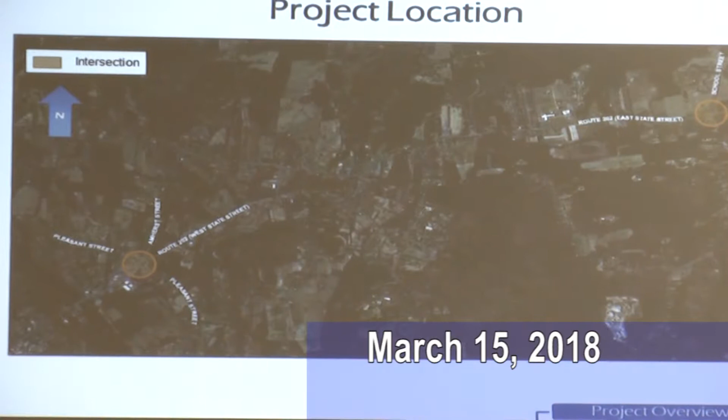This project covers two intersections, the 5-corner intersection and the School Street intersection. You can see in the locus map, for the 5-corner intersection, the project along Route 202 is about 1,400 feet long, and for School Street, it will be 1,100 feet long.

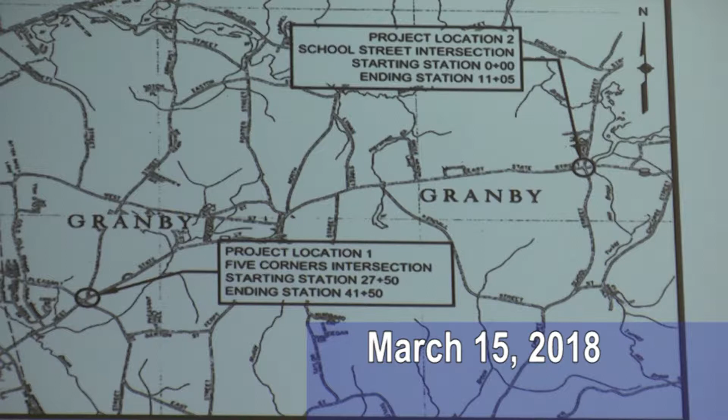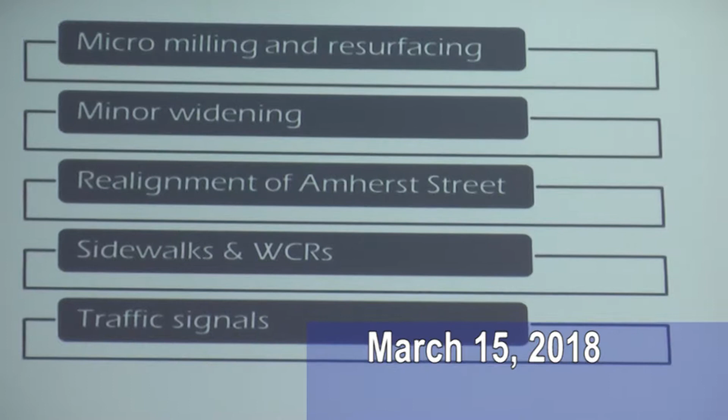The scope of work so far will cover the micro milling and resurfacing, minor widening, realignment of Amherst Street, sidewalk and wheelchair ramps, and the traffic signals. I will talk about the background and history first.

Both locations are ranked within the top 5% of high crash locations within the PVPC area, so they are eligible for the FHWA's Highway Safety Improvement Program. So a road safety audit was conducted in March 2013. An RSA usually is a formal safety examination of a roadway by a multidisciplinary team. The purpose is to identify safety issues and possible improvements considering all roadway users.

So this team took a walk, discussed and reviewed the crashes, and then identified safety issues including congestion and driver frustration, speed and sight distance, intersection geometry and signage, turning lanes, signals, access management, and pedestrian accommodation for these two intersections. So our design will try to address these safety issues identified in this RSA.

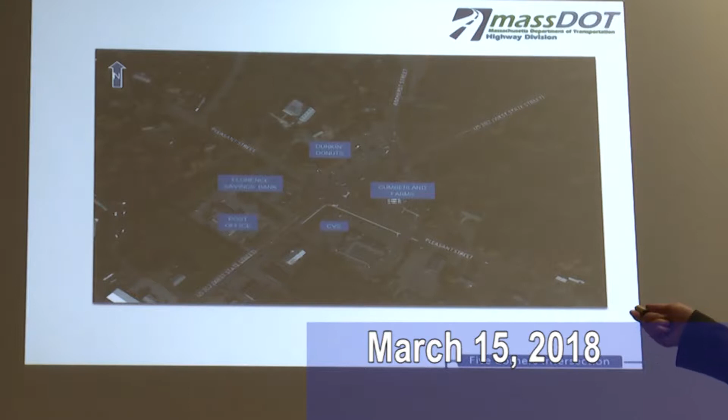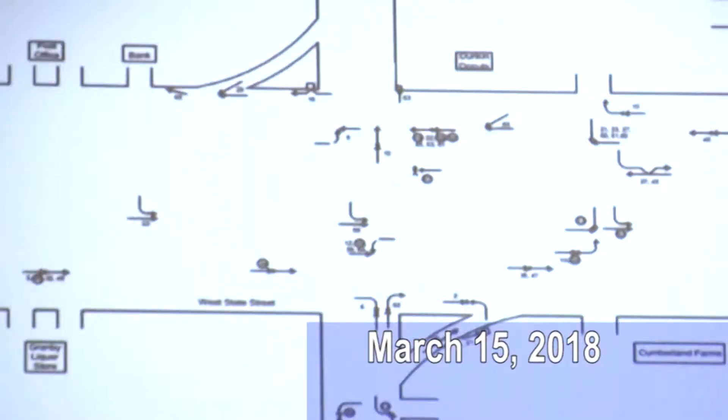The 5-corner intersection in fact includes two separate intersections, 250 feet apart. This intersection, Pleasant Street and Route 202, is a signalized intersection, and Amherst Street, the Cumberland Farms driveway and Route 202 are stop controlled at Amherst Street, an unsignalized intersection. Here is a crash diagram.

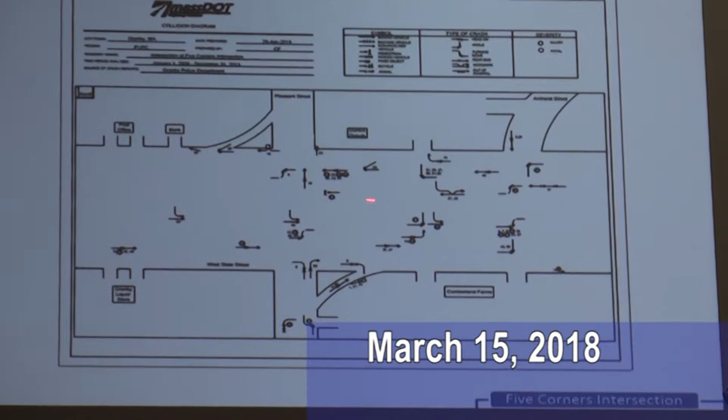For these 69, we can see there are 51 on Pleasant Street and Route 202, and 18 on Amherst Street and Route 202. So we ran a little more analysis and we can see about 44% of crashes happened in the afternoon commute time between 2 and 6, and 14% happened in the morning commute time. And most, 42%, are angle, and 36% are rear end for this intersection.

A further analysis shows there are about 10 crashes related to the left in and left out of Dunkin' Donuts, and another 2 related to the left in from Route 202, cars driving this way and trying to turn left into Dunkin' Donuts. There are 10 crashes where they're trying to turn left into the Cumberland this way. So these are two very typical crash types at this intersection.

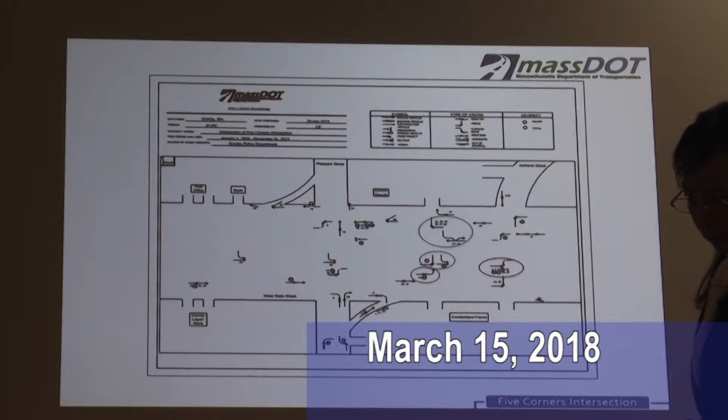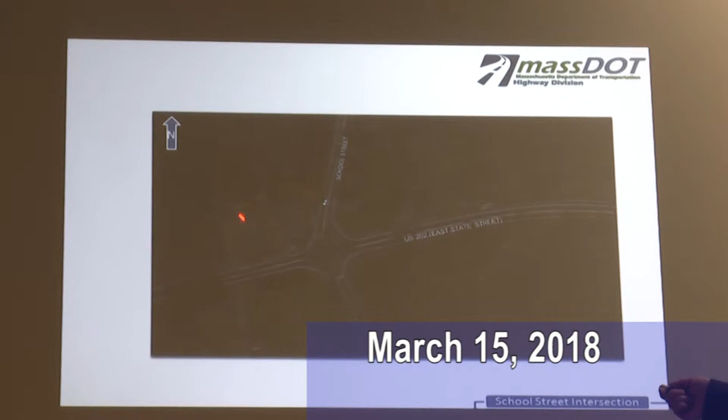So now we can talk about School Street. School Street is just one lane for each approach, and here is stop sign control. The Grand Cafe was here, but it was demolished in 2014. So basically, the land use around School Street is very rural.

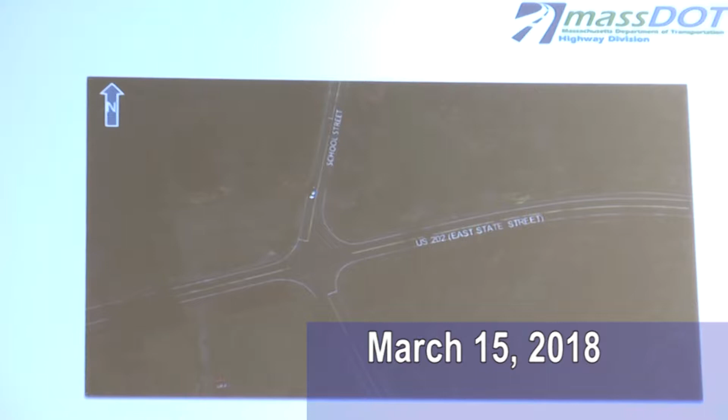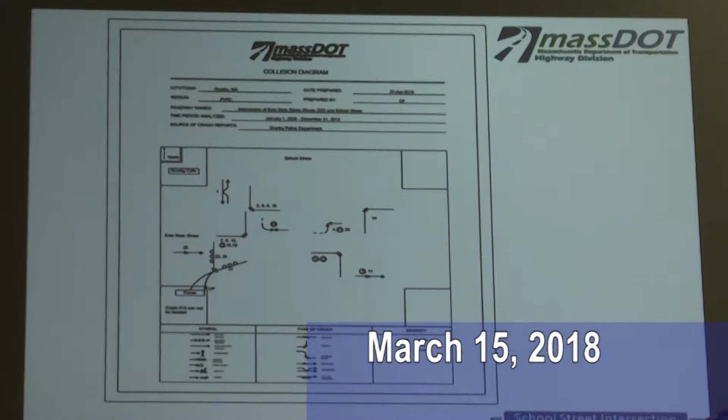So here are all the crashes for School Street over these six years. We can see there is another peak for the afternoon commute, about 40%, between 2 and 6. And the pattern is a little bit different between these two intersections. Here, 52% are angle, and 20% are sideswipe.

You can see here a lot of crashes in fact happened between southbound vehicles from School Street and Route 202 traffic. Although this is controlled by stop signs, still a lot of crashes happened between these two.

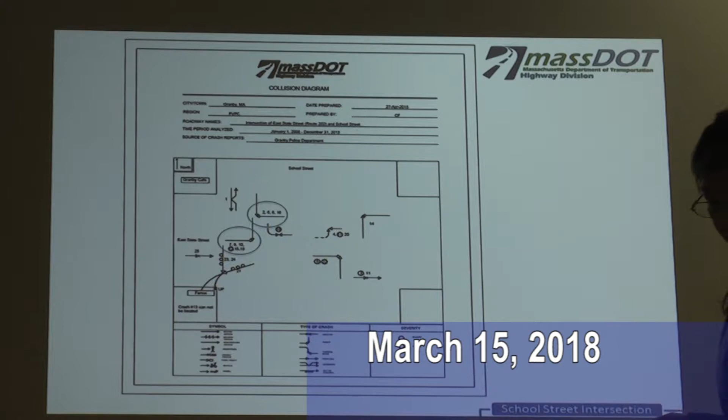Okay, now we come to the third part, project design consideration.

Route 202 is classified as an urban principal arterial. The design speed is 45. Route 202 has 12,783 ADT in 2014. This is Route 202's number. This project mainly is for safety improvement.

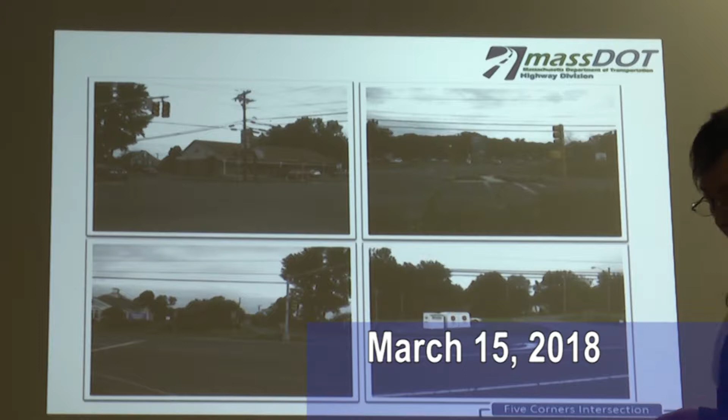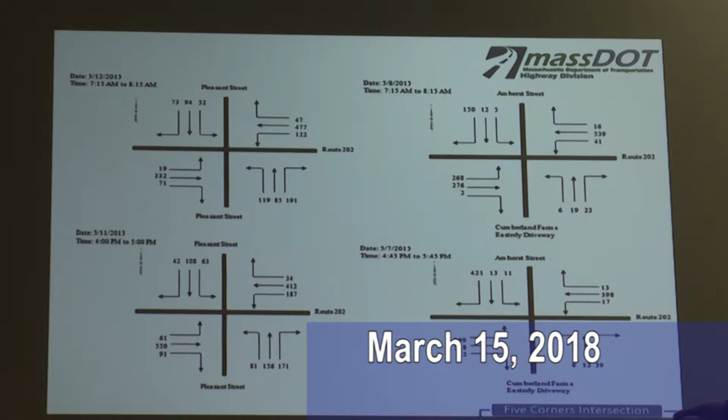We did ATR in May 2015, and here we put the count west of Pleasant Street, north of Route 202 on Pleasant Street, and then we got this number, and you can see the morning and afternoon peak. This is the turning movement count in May 2015, and based on the turning movement count we got the crash rate for 5-corner is 1.07. For the intersection of Pleasant Street and Route 202 it is pretty higher than the average rate across the district.

Since the safety for Amherst Street and Route 202, we explored the idea of signalization. So we ran the MUTCD traffic signal warrants, and we found out it meets 3 warrants. Only for warrant 7, only 1 criteria meets. And we ran left turn lane warrants too. For Route 202, the approach to Amherst Street from the east side has no left turn lane. So we ran the left turn lane warrants and they meet warrants.

So although it meets the warrant for the intersection of Route 202 and Amherst Street, signalization is not proposed at this point for this project because the two intersections are only 250 feet apart. It's very complicated to coordinate these two signals.

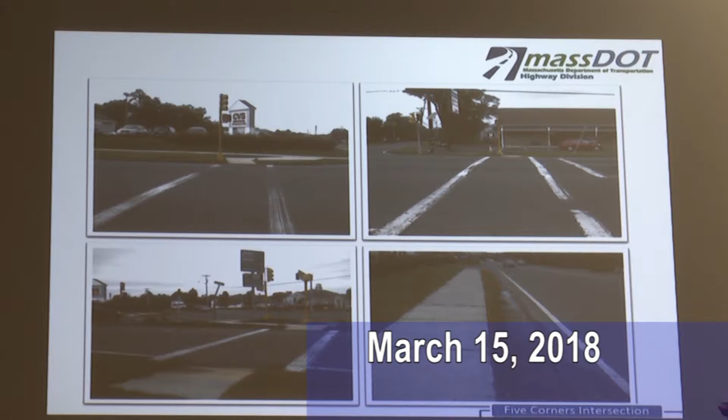Accessibility. The existing facility doesn't meet the current ADA requirements, and it's very hard access for the elderly, people with disability, and even children. You can see here, the intersection only has a section of sidewalk along the CVS pharmacy. For the rest, there's only a crosswalk and a wheelchair ramp. That's all the walking path.

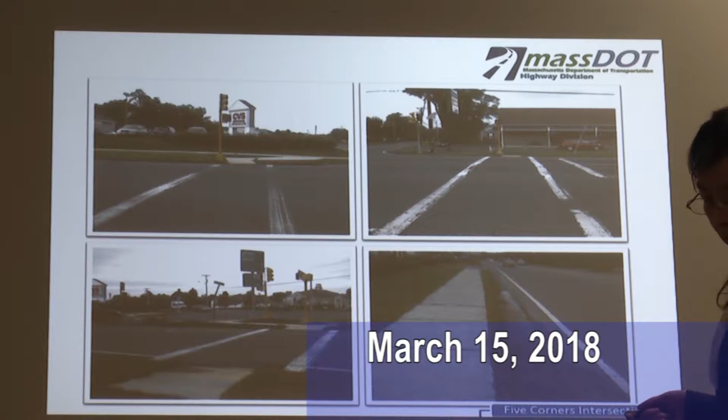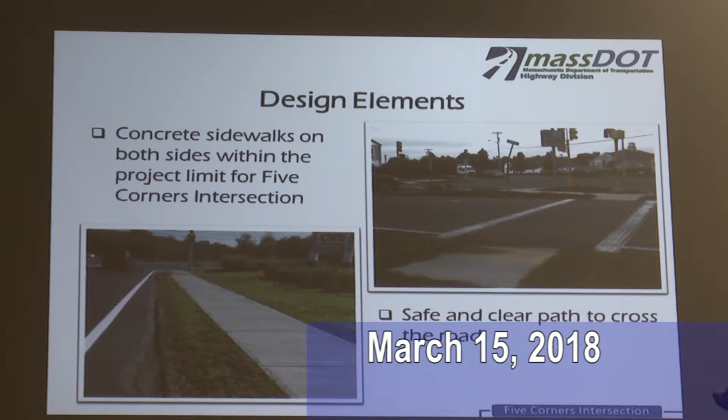So to improve this and accommodate pedestrians, we propose a concrete sidewalk on both sides within the project limit for the 5 corner intersection, and crosswalk, wheelchair ramp, pavement marking, pedestrian signal head, and accessible pedestrian signal push button to meet the ADA requirements.

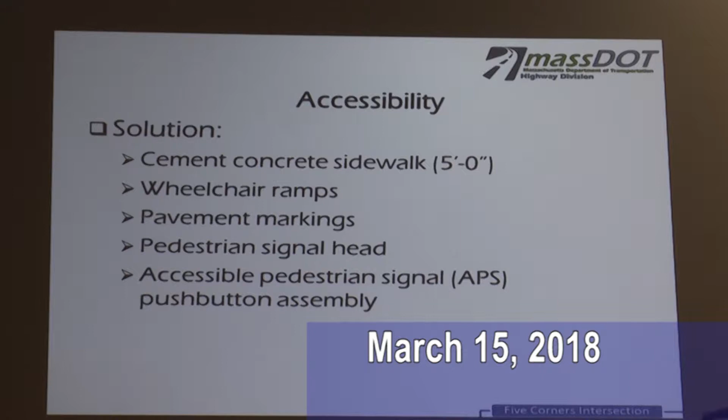So this design shows all the proposed work for the 5 corner intersection. You can see for access management, we propose right in and right out for the Dunkin' Donuts driveway. For pedestrians, we proposed sidewalk along the project limit, and all the sidewalks and crosswalks are signal controlled except this one for Amherst Street.

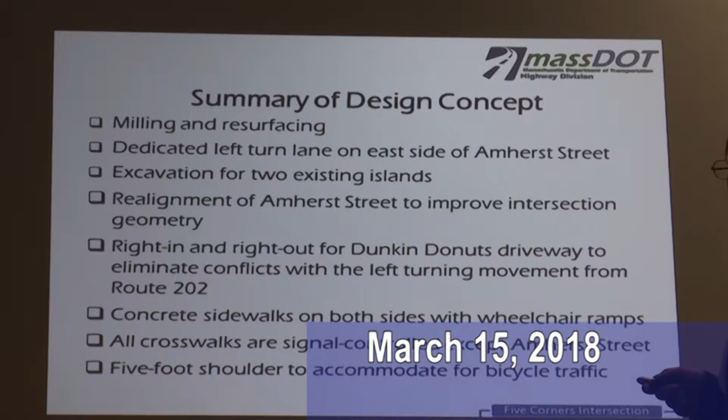We proposed minor widening so we can accommodate a 5 foot wide shoulder and this left turn lane for Amherst Street. We proposed micro-milling and resurfacing for the whole project, and we propose the excavation of these 2 existing islands, to make them small and easy to control. We propose to upgrade the signal heads so they align with the travel lanes. Right now the existing situation is not aligned very well.

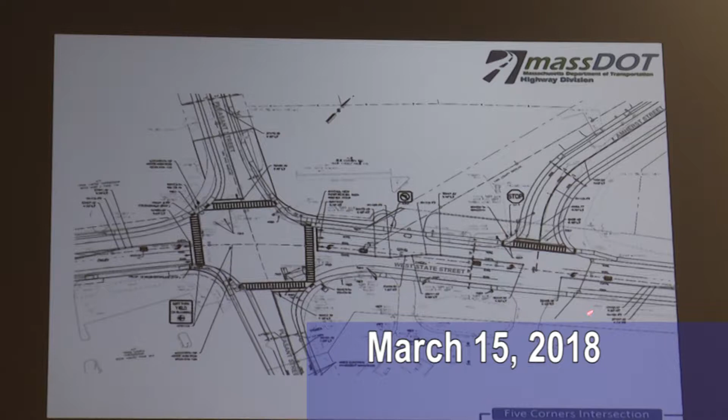Another big thing is trying to improve the intersection geometry. We propose to realign Amherst Street. Amherst Street and the Cumberland Farms easterly driveway are 20 feet apart. So we propose to realign them so they align with each other, making the left turn either from Route 202 to this street or Route 202 to the driveway easy. But a left turn vehicle parked here waiting will block people going into Amherst Street.

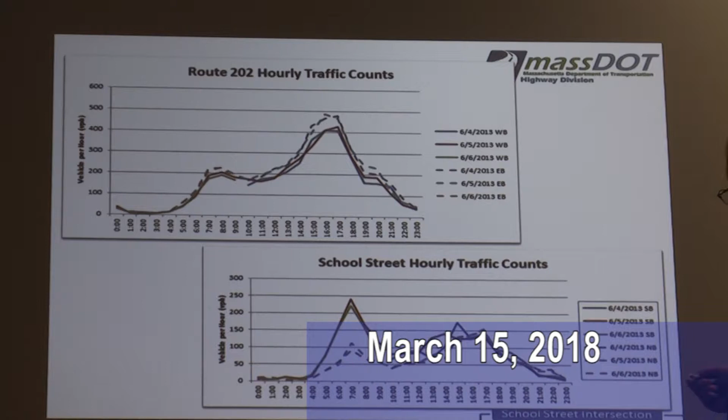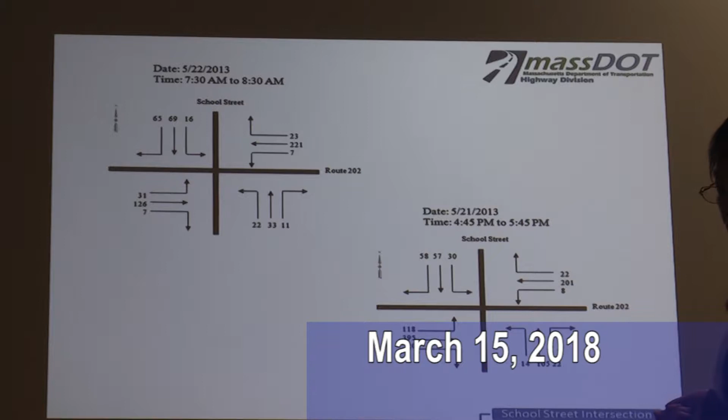Okay, now we move to the next intersection. This is School Street. School Street is pretty simple, with a single lane approach. We did the ATR, traffic counts, and turning movement, and got a crash rate of about 0.98. That's higher than the district average too.

So we ran the traffic signal warrant that is recommended in the RSA, and we found out they meet warrants 1, 2, 3. For warrant 7, criteria C is needed. Criteria B, which is crash, almost meets. The left turn lane warrants meet too. So for School Street, we propose to signalize this intersection.

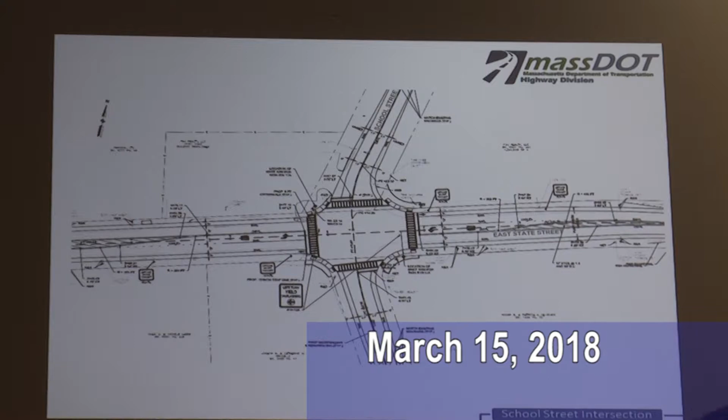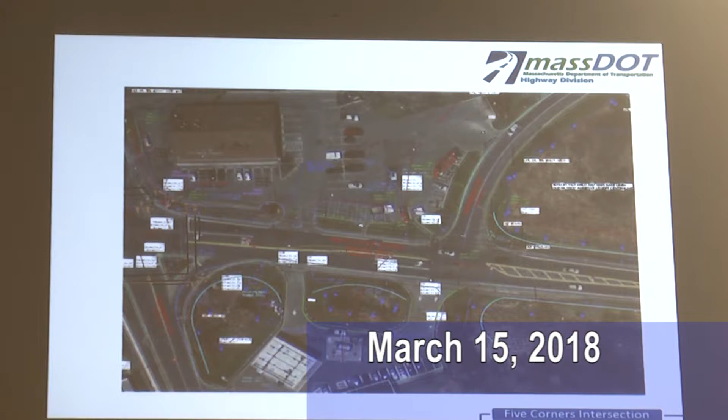So we explore the possibility to realign this driveway. The issue that brings is the wetland replication, because besides the driveway, it is all wetland. If we do flat slope work and the requirement, we need to replicate a wetland of 1,400 square feet. That we need approval from the environmental section and find where it is, because within the project limit, we couldn't find a place to replace this wetland. So that will be beyond this project limit and need permits from environmental.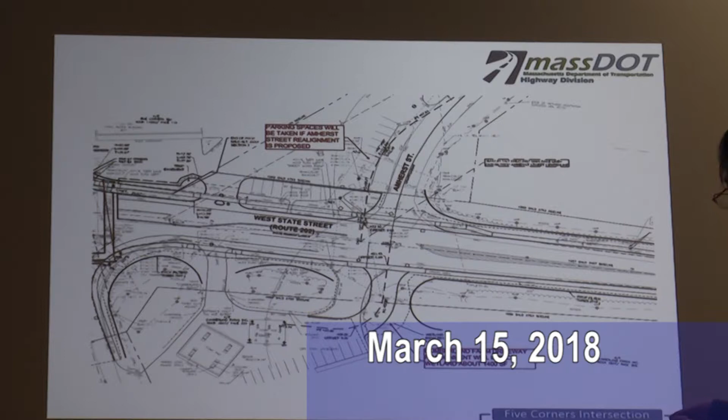Another alternative the design team explored is a roundabout. You know, across the state, a lot of roundabouts are built and they run smoothly. For these two locations, we did run a test run. But the problem is right of way here. Oh, I'm so sorry you couldn't see it very clearly. But for the 5-corner intersection, this roundabout is only for Pleasant Street and Route 202.

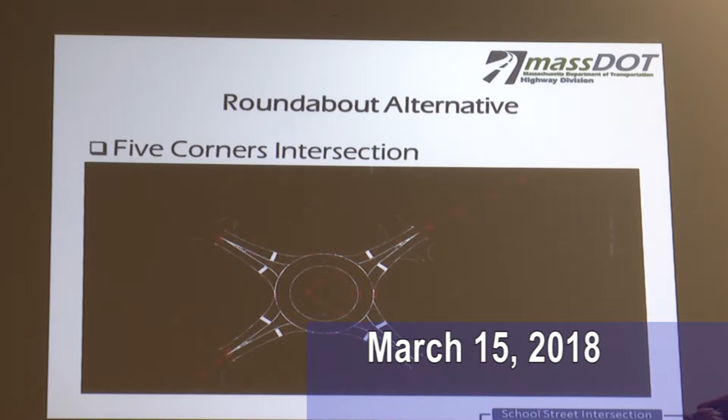To build this roundabout, for right of way we've got to take land from the city, Cumberland, and this owner, a lot of land we need to take. This only shows the edge of pavement. In fact, we need feet after feet along there. We ran another at School Street too, same, right of way is a block. So, yeah, but we did explore this alternative.

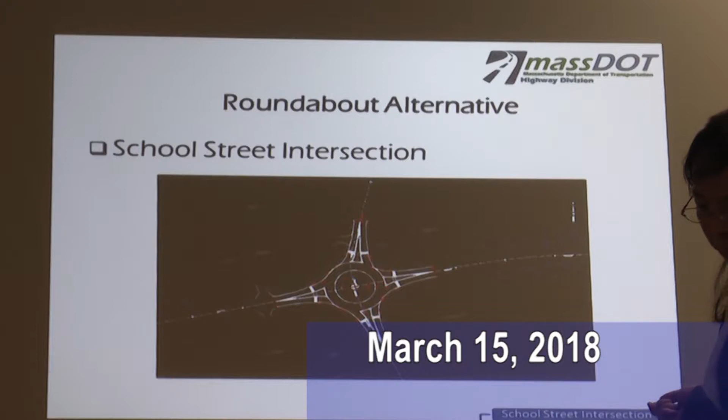The funding for this project will 80% come from federal and 20% come from state. For the 25% stage, the total will be 1.7 million. This project is scheduled to be advertised December 18, 2021, and we'll begin to build spring 2022.

So this public hearing is a good opportunity to present what we did and to hear from you, and then we can continue to improve this and push this project forward. So after this meeting, we will compile public input and then push this design plan from 25% to 75% to PS&E, and open construction. Okay, thank you very much.

Thank you. Before I open the hearing to questions and comments, I'm going to explain the hearing procedure. First, the purpose of this hearing is to solicit your input regarding this project. As the plans are not yet complete, we may not be able to answer all of your questions or respond to all of your comments at this time. Next, we ask that anyone who wishes to have his or her comments entered into the official hearing transcript, please stand up, come to the microphone, identify yourself by name and affiliation, whether you're an abutter, local official, or concerned citizen. Please spell your last name. This is necessary in order for us to obtain a full verbatim transcript

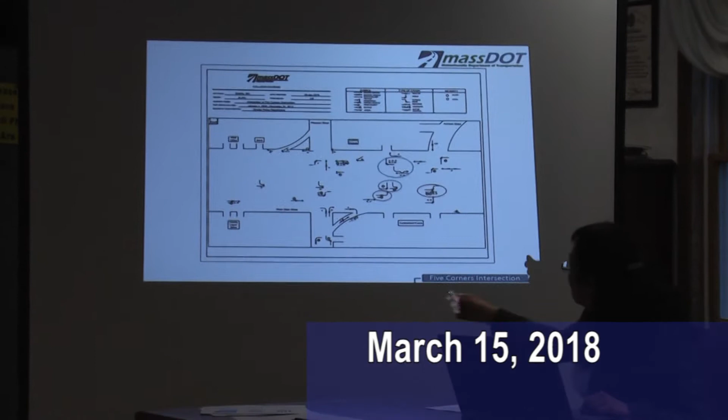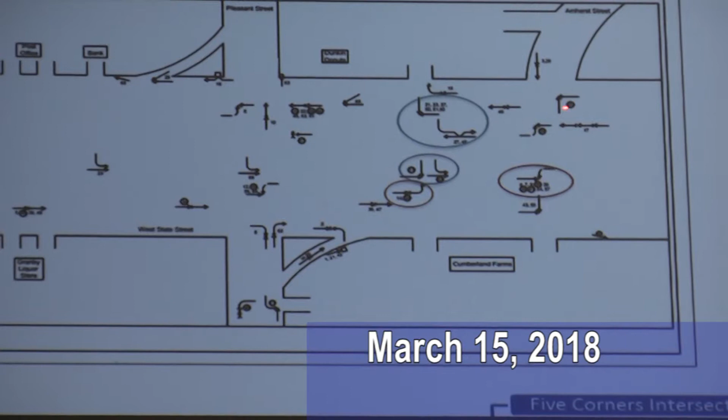All right, so in the diagram here, the ones with the circle, how many are there on each side? The little circle, is it like this one? If this one has a circle, that is injury, so this one has injury. So the rest should be property damage only.

From the diagram, it does look like there's a lot of sideswipes and rear ends, which would suggest lower severity. There are a few turning crashes, which can be more severe, but it doesn't look like from the diagram there were many injuries. It was mostly property damage. Yeah, 42% angle and 36% is rear end. So a lot of things are going on in this intersection. They want to turn left, they have so many things. So, as you just said, a lot of them are maybe sideswipes and stuff like that.

Moving the road, is that going to eliminate that? Or are those things still going to occur, people still making a turn right there? Moving the road, is that going to lessen the problem there? Is that what it's supposed to create? It's more the fact that we're including left turn lanes, which should help that, just to get people out of the roadway. But you're right, moving them closer together isn't going to alleviate any of the current issues you're seeing. I know they did talk about moving the Cumberland Farms exit coming onto 202.

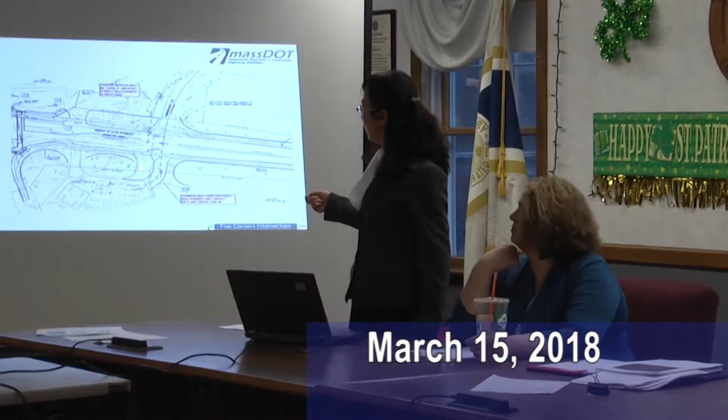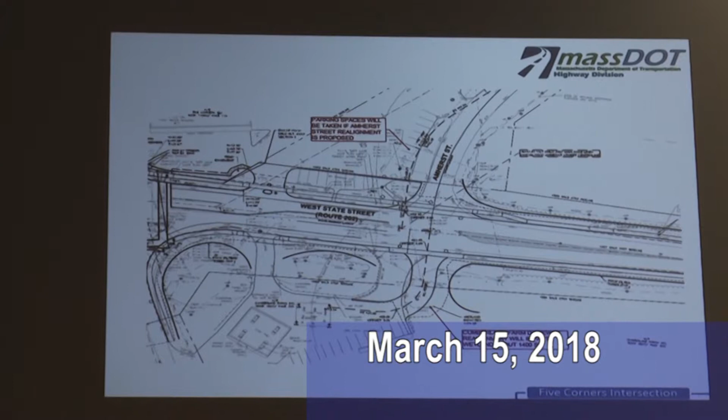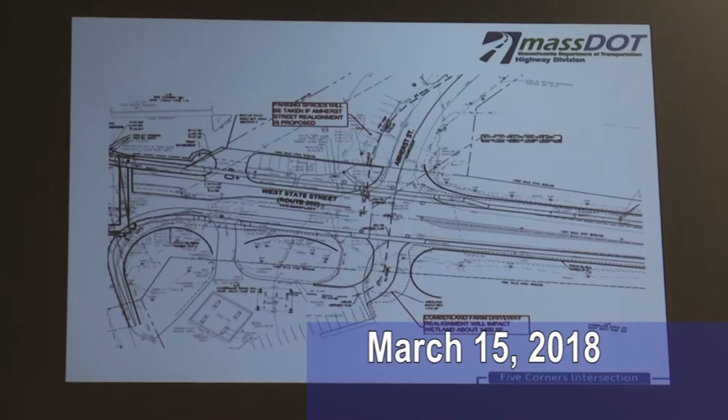Yeah, you can see from this drawing very clearly. Now this Amherst Street and this Cumberland driveway are about 20 feet apart. So the people who travel westbound, if they want to turn left, they will stop here. Some stop here, it's far, but if they go this way and then turn left to Amherst Street, they will go this way. So here we have the conflict point. That's why we need to either move Amherst Street or move this driveway.

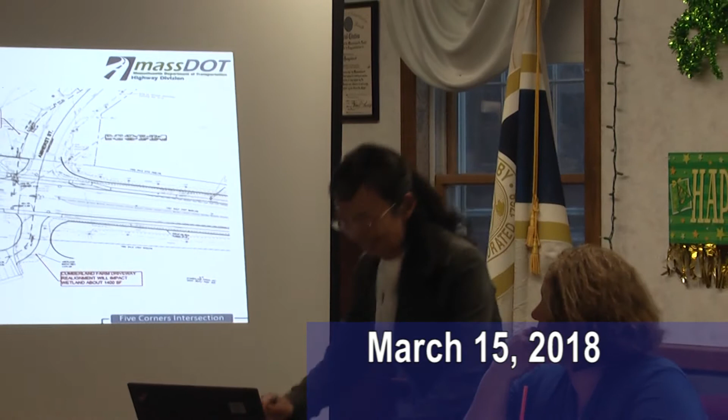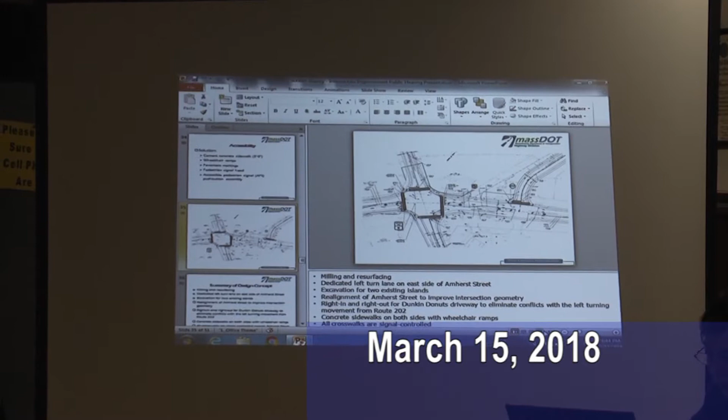Okay, the third question is sidewalk. Sure. We're trying to do good about sidewalk. I will show you. Yeah. The gentleman's question is, why are we putting them there, where do they end and what's the purpose, I think is the question?

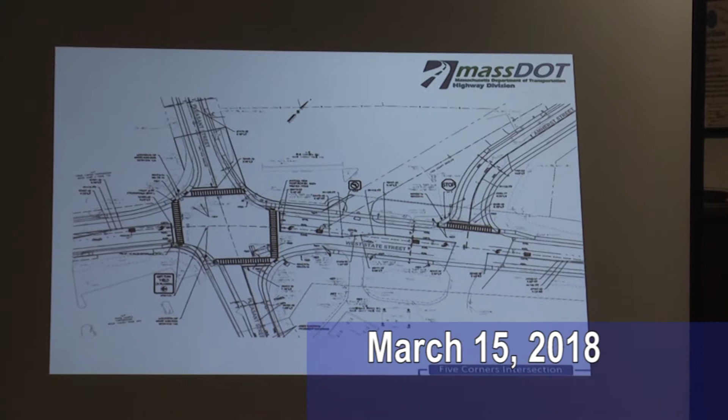Yes. Okay. MassDOT does have a policy that with every project we do, we will look to improve pedestrian and bicycle accommodation. It's called our Healthy Transportation Policy Directive, which intends to make modes of travel other than getting in your car safer, and hopefully more people would feel safe walking or biking than having to take the car. So in this location, where the surrounding development is commercial and there's potentially a lot of pedestrian destinations, and it's next to residential areas on the north side of State Street especially, we do propose to put sidewalks around this whole project limit.

They do have to end somewhere eventually, and that's always a question of, if I'm doing a project now and I put sidewalks in and there's no sidewalks beyond there, what good is it to have them there? But our policy is basically, as you do the project, you try to put in the pieces. And I should also note that we have two separate projects that go on either side of Five Corners here. We have one that's going to resurface and look at pedestrian bike accommodations west of Five Corners. That's the South Hadley Granby Route 202 project, which is just at 25% design and is scheduled potentially for advertising in 2019, which will be looking at the sidewalks west of Five Corners.

And then we have another project on 202 from Granby to Belchertown, extending from where this project ends all the way into Belchertown up to the Route 21 intersection, which is scheduled for advertising in 2022, the same year right now as this project. We'll also be looking at sidewalk and bike accommodation, and could potentially extend the sidewalks from this project into the center of Granby and other locations. So we'll include the sidewalk pieces with the work we're doing here, and then we'll look beyond there in those two other projects.

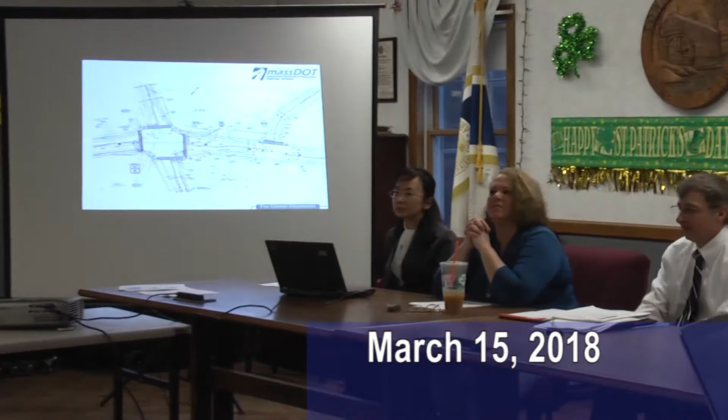One of the other questions I had, again, looking at the plans, it looks like Amherst Street will now come down at an angle into Route 202. How beneficial is your sight line for looking north on 202 when you're coming out? Now that your vehicle is at an angle, unless I'm seeing it different, is it going to turn into, like it does now, as you're coming at an angle?

Okay. It will basically approach at a 90-degree angle. So when you're at the stop line, same way it is now. Sorry, gentlemen, one at a time. Sorry. So yes, when you're at the stop line at Amherst Street, whether it's the way it is today or relocated, you will be perpendicular to Route 202 and have a sight line both ways. Is anybody else?

Al Wishart, my last name is W-I-S-H-A-R-T, and I'm Chief of Police in Granby. I have a couple of questions. I share the same concerns as Selectman Sexton about moving Amherst Street closer to the intersection. There's a lot going on there already, and I'm not so sure that moving that intersection closer to the other intersection is going to solve anything. I'm concerned that it's going to create some problems.

The question that I also have is this would be the southerly most entrance on 202 for Cumberland Farms. It currently has a sign that says entrance only, but people exit out it on a regular basis. Has there been any thought given to either getting rid of that entrance exit, or doing something almost along the lines of what you did across the way in the Dunkin' Donuts entrance to make sure people cannot go out it?

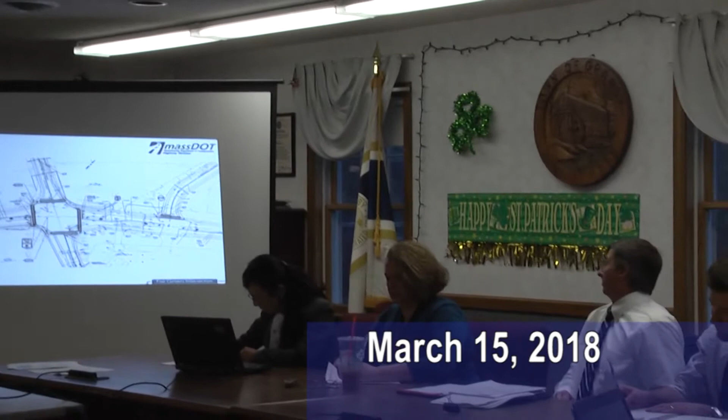Currently there's not a change proposed to that driveway. It's basically going to be retained as entrance only without any modifications. Is that correct? Yes, along Route 202, the Cumberland Farms has two open curb cuts. You know, we gave them a permit at one time. If we want to close that, yeah, I think that's something we can look at maybe again.

A lot of times with these convenience stores, there's an issue with not just the customer flow, but the trucks that deliver the gas, and they need a route in and out that works for trucks turning. So we'll take a look at that and see if there's potentially anything we can change about that westerly driveway. Were you discussing the one across from? No, that one right near the, across from the Dunkin' Donuts parking. Thank you.

So again, oftentimes it's about trying to provide that circulation that allows the deliveries. We will take a look at that. Being so close to the intersection, certainly people slowing down to take the right in, with someone behind them coming through the green light, can create some issues with speed differentials. So I think that's something we can look at.

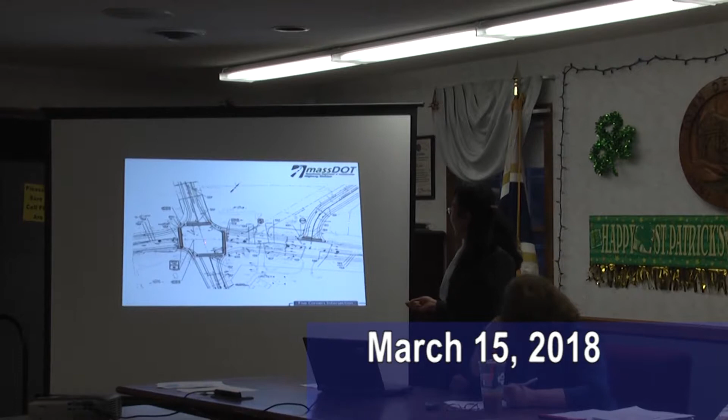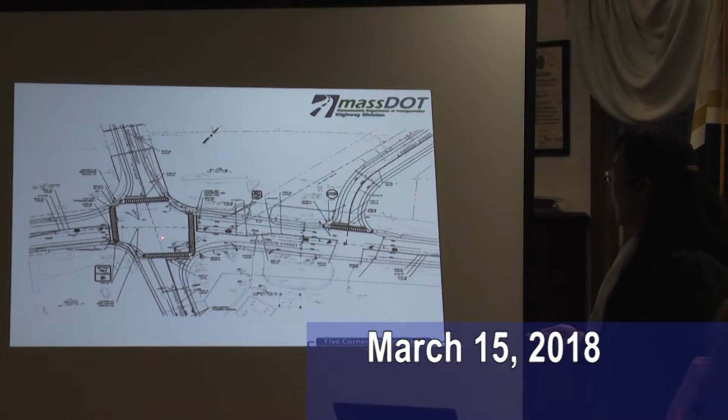Yeah, eliminated the left turn. You cannot make a left turn once the project is built. So there'll be no left turn, right in, right out only. If people want to turn left, they need to make it like this. Like what? Here, look, you gotta go through... Excuse me, folks, one at a time, or nothing. Okay, go ahead, continue, please. So people cannot just take a left through this driveway.

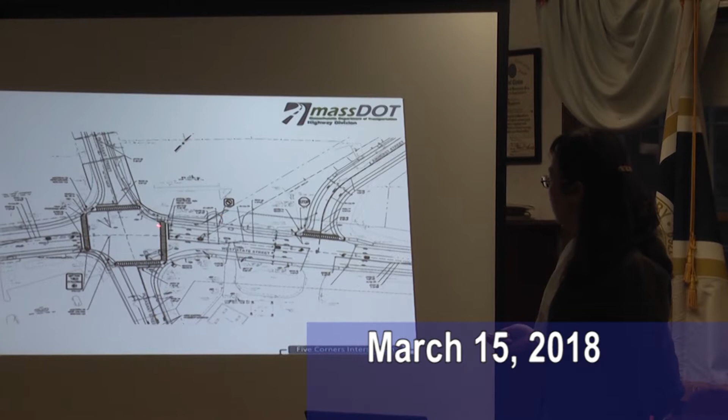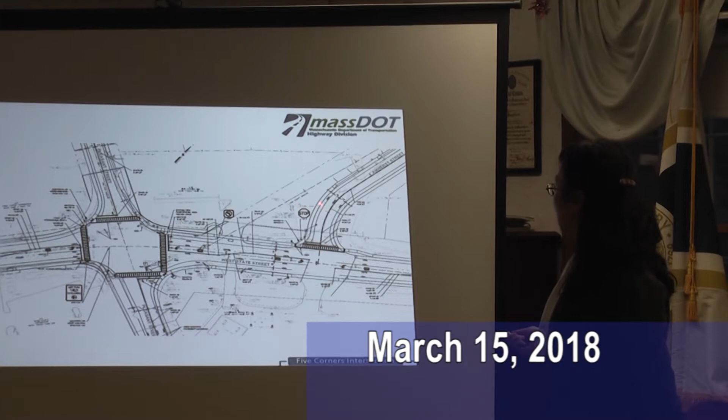Okay. Can you also speak about the left out, Chuck? Left out will be, they cannot go left out this way. They will either go this way and turn left. You know, here there's a curb cut, a big curb cut. So we will encourage people to use this way.

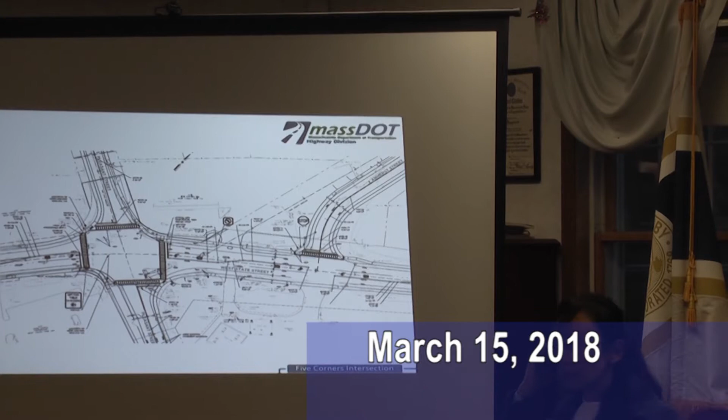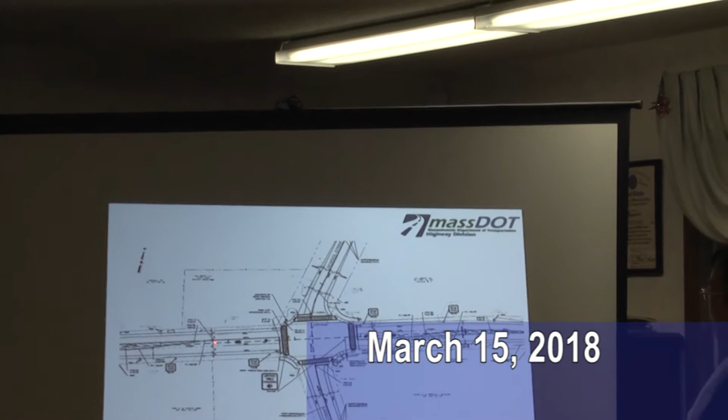Okay. Second question, on School Street and 202, are you just planning on putting in traffic lights and no other improvements, or what exactly are you going to do in that area? Will you be widening it at all? Right now Route 202 is a single lane on each approach, and we propose minor widening, so we can put a left turn lane in both directions along Route 202. So with this signal, the left turn at this intersection would be protected.

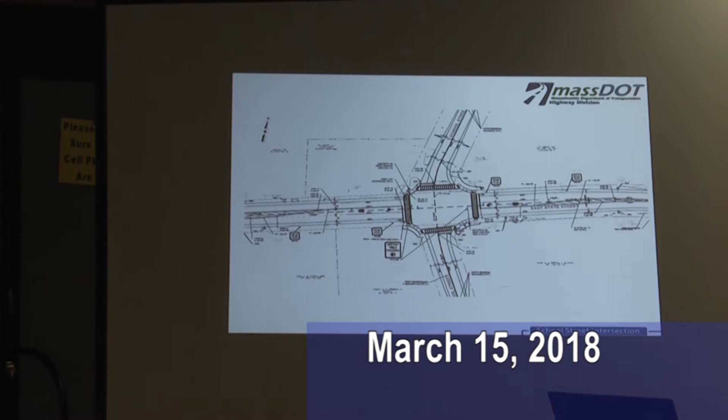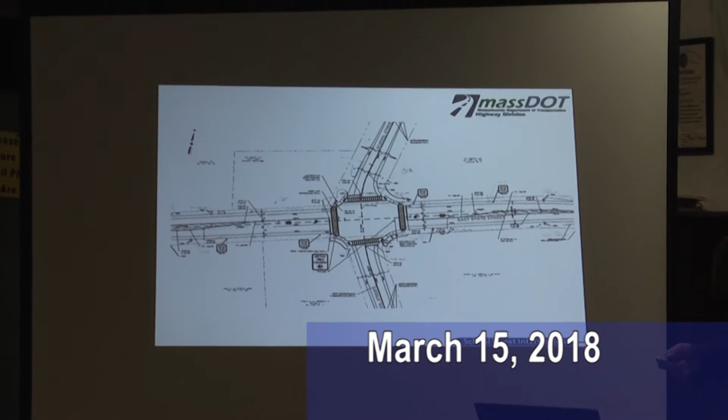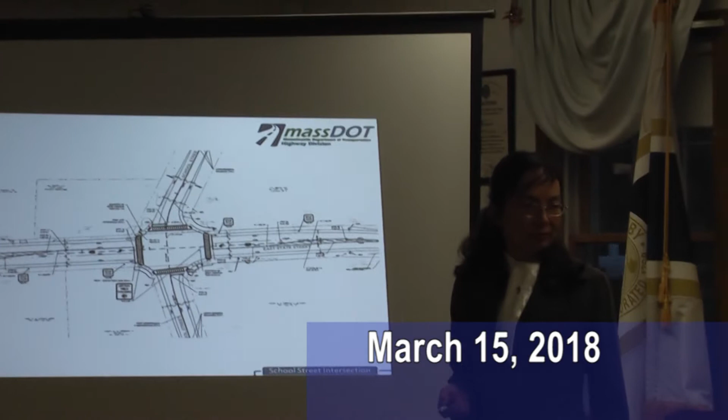And will there be turn on red? Right turn on red? Yeah. You mean the right turn on red? Yeah. It's something that we'll have to look into, because that can sometimes be restricted due to sight distance. So we'll have to analyze that to see if there may be certain approaches that will be no turn on red, but there may be others that aren't. But that's something we'll have to evaluate.

Okay, and my last question, on easements and rights of way, could you basically explain what the difference is? And how do you come up with the price that you offer homeowners? Is that something that's negotiable? After our members come and visit you, we turn it over to a team of appraisers that's certified by the state. They will look at prices that are selling in your area, and they'll come up with a formula for what they feel is the fair market value of the property. They do vary, depending on a taking or if it's a temporary easement.

But is there a difference between an easement and a right of way? Oh, yes. A temporary easement is just what it means. Just for us to work in there temporarily for a select period of years, and then the land reverts back to you. A taking would be exactly that. It would be a taking. We would take some to widen the road or whatever is necessary. Okay, thank you.

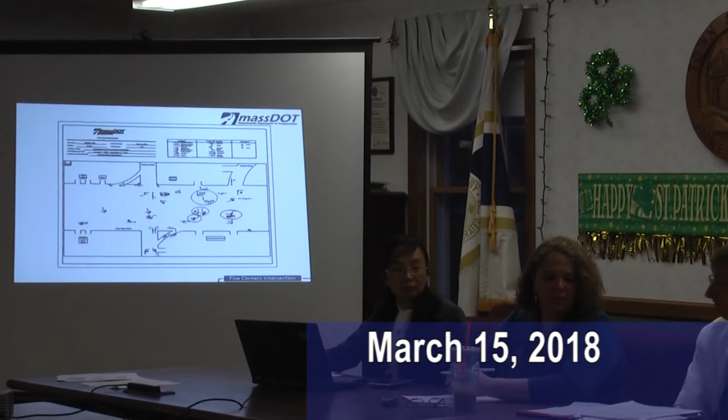Dave, you were talking about left turn out of Amherst Street to 202 northbound, and the courtesy crashes there. Correct. It's the same situation as coming out of the Dunkin parking lot now. And I think at the road safety audit, we said we've got to stop the left turns out of the Dunkin parking lot, but you can't stop the ones coming out of Amherst Street, obviously. But I'm just a little concerned about the same scenario with that type of crash at that location.

I think, in fact, courtesy crashes was a fairly large percentage of the crashes at this location, where someone waves you on, there's a vehicle that's coming up behind them or something, and causes a conflict. But again, it's not unique to here. It's a problem wherever you have these developed areas with commercial driveways next to signalized intersections. It'd be wonderful if all these driveways and commercial developments were never permitted right at these intersections, but they're there. We don't want to take all the businesses, obviously. We want places for your commercial businesses to occur and things like that. But the courtesy crash is a typical problem.